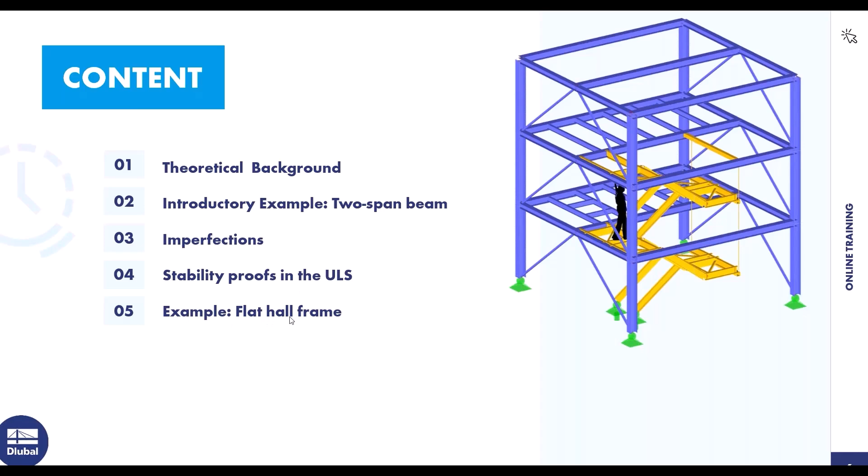That's the content today. At first, I say something about the theoretical background. Then we turn to an introductory example, a two-span beam. Then the next point is imperfections, then stability proofs in the ultimate limit state. And then we turn to a second example, a flat hall frame.

At first, I say something about the products for the design according to EC3. The most important add-on is the steel design add-on, and with that add-on you can design steel members according to international standards like Eurocode, AISC, and so on. We use or calculate or design according to Eurocode today.

Then there's the add-on torsional warping. With that add-on, you can consider the 7th degree of freedom and the torsional warping. Then steel joints: with that add-on, you can analyze steel joints based on the finite element method. Then there's the cross-section program, RSECTION.

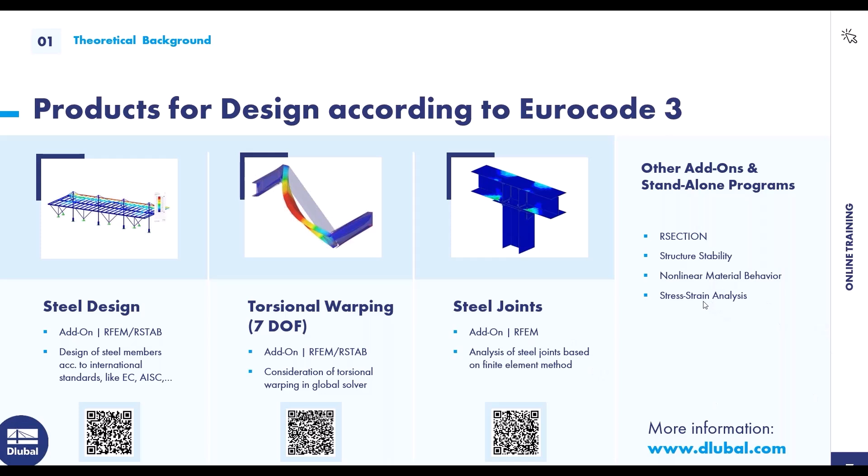Then the add-on structure stability. We use that add-on in the second example. Then there's the add-on nonlinear material behavior. You can, for example, consider a plastic design of steel plates and so on. And then there's the add-on stress strain analysis.

Okay, then a little insight into the whole safety concept in steel construction. The actions should always be smaller than the resistance. Those are the actions, this is the resistance. And in addition, we have certain coefficients that we have to take into account depending on what type of proof is used. You can see the different coefficients here, and those are the coefficients for the German national annex.

And you can see there is for the stability analysis another coefficient, the safety coefficient. But if you select the German national annex, for example, or another national annex, this coefficient is considered automatically by the program.

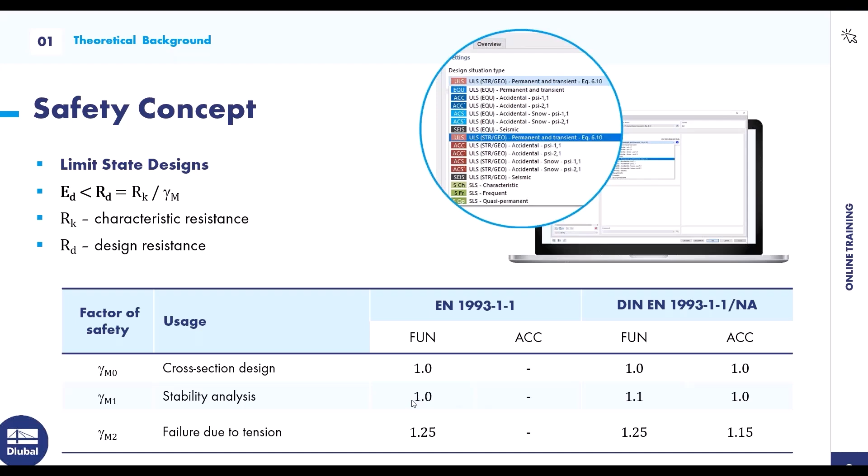So, okay, then the next slide: elastic or plastic global analysis. Whether an elastic or plastic calculation is possible always depends on the cross-section classes. There are 4 cross-section classes. For the first cross-section class, there's a high rotational capacity, and this allows a plastic structure calculation. Now, for example, you can consider plastic hinges, but it's not so often used in practice.

And the cross-section resistance can be applied plastically. Cross-section class 2, where there is a low rotation capacity, allows only an elastic structure calculation. And as with cross-section class 1, its cross-sectional resistance can also be applied plastically. So the first and second cross-section classes are where you can consider a plastic cross-section resistance.

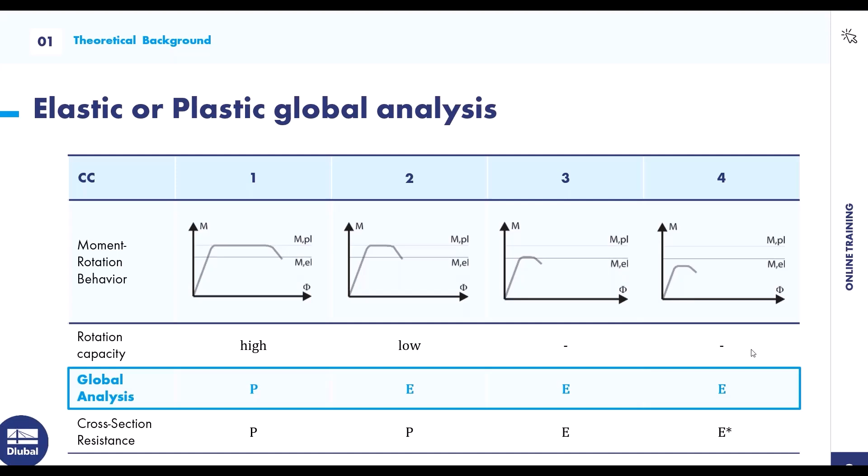That's the first example, the two-span beam, with a field length of 12 meters left and 12 meters right. A beam IPE 550, steel S235, a self-weight load case, and a load case with an imposed load. And we will calculate or do a cross-section classification, cross-section design checks, the difference between the elastic and plastic cross-section resistance. We take a look at the design checks: elastic, and elastic-plastic.

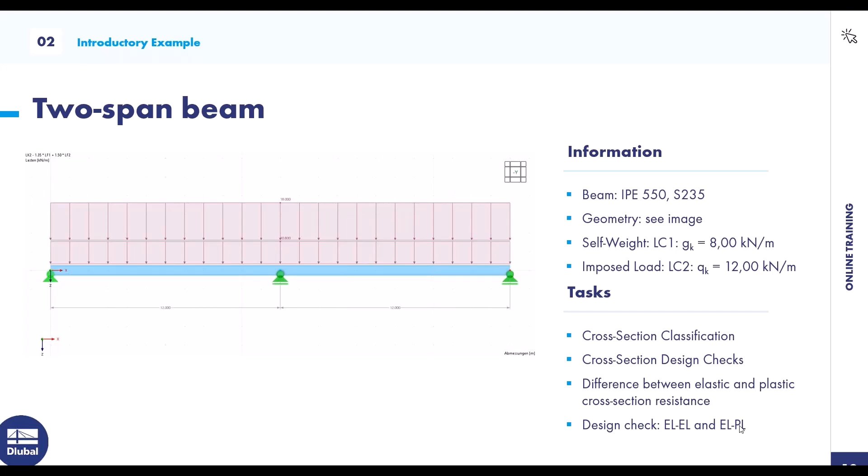Okay, I turn to RFEM. That's the second example; it's already prepared. But for the first example, I model the complete structure. File, new.

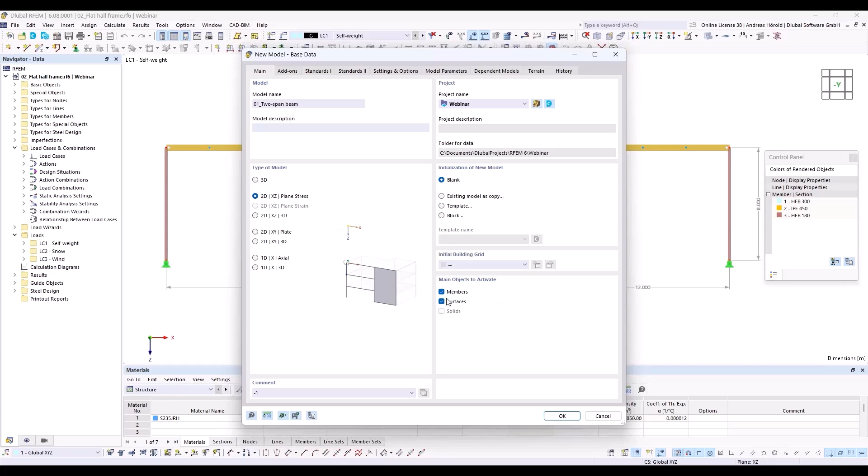So I enter 01_Two-span beam. Type of model 2D is sufficient. We consider only members, but you can also select surfaces. That doesn't matter. And we select the steel design add-on.

Then we need to select the standards. You can see there are, for the load case classification and the steel design, different international standards. We select the Eurocode, and for today we are in Germany here, we select the German National Annex.

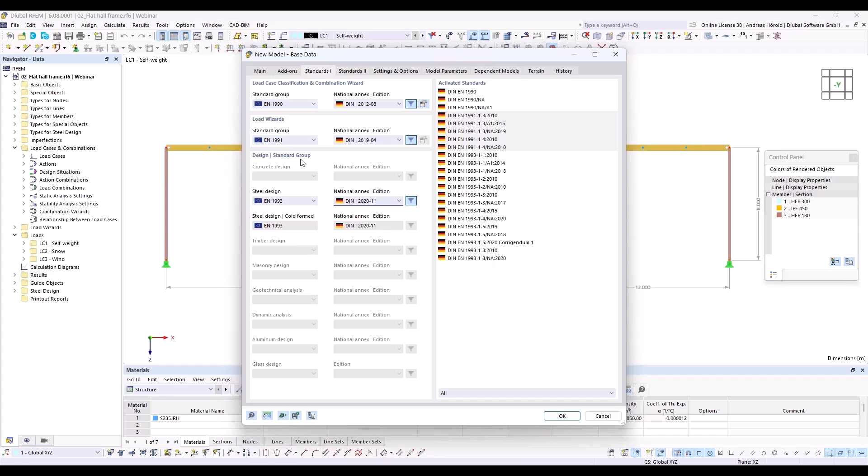We don't use the load wizards, but we use the load case classification and the steel design. We leave the dialog with OK.

So I turn to the view -y, move it a little bit. The grid is 1 meter. I leave that. If you want to change that, you can click on this here at the bottom, display grid, right click and then edit. And you can change the space for the grid points.

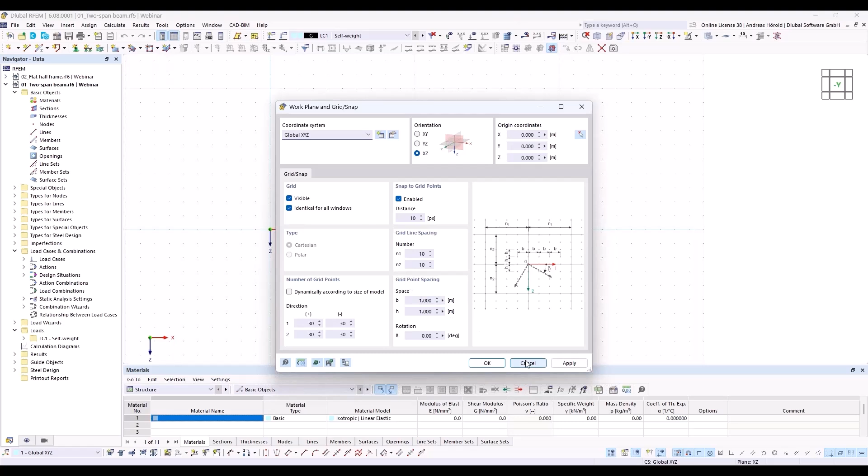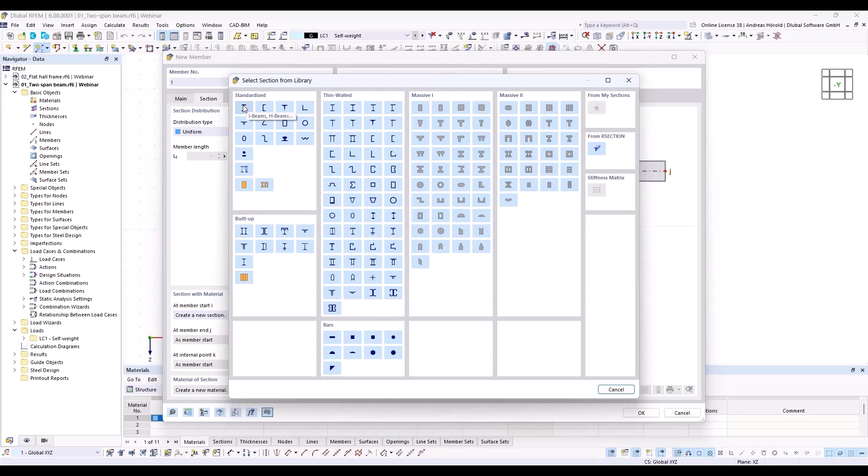So I start with the beam. Here, left above, new single member. I need to define a section. Create new section. I turn to the library. Left above, an I-beam. If I am too quick for you, that doesn't matter.

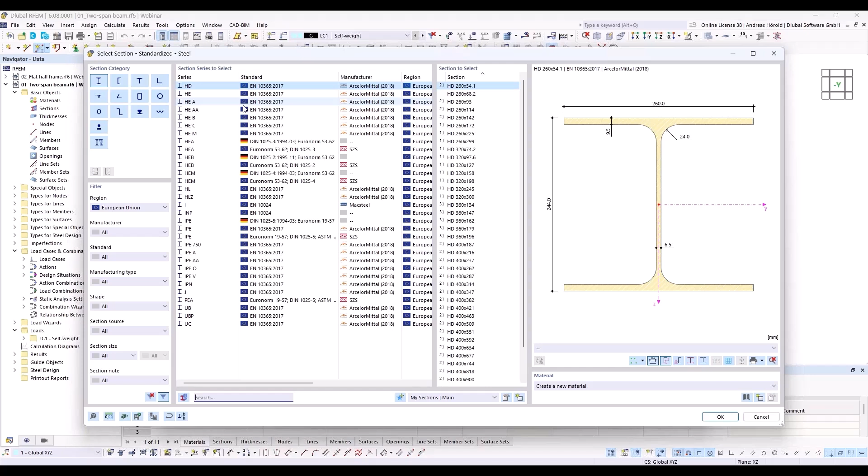That's sufficient. Okay, I select IPE 550, and right at the bottom I open the material library and I select European Union, steel, carbon steel.

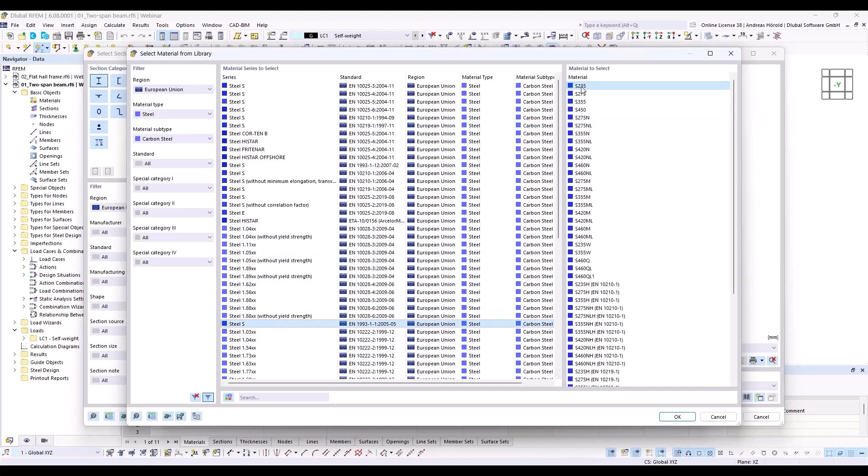There are a lot of steel materials. I use the steel material S235. Okay, you can see now the color is blue. That's okay.

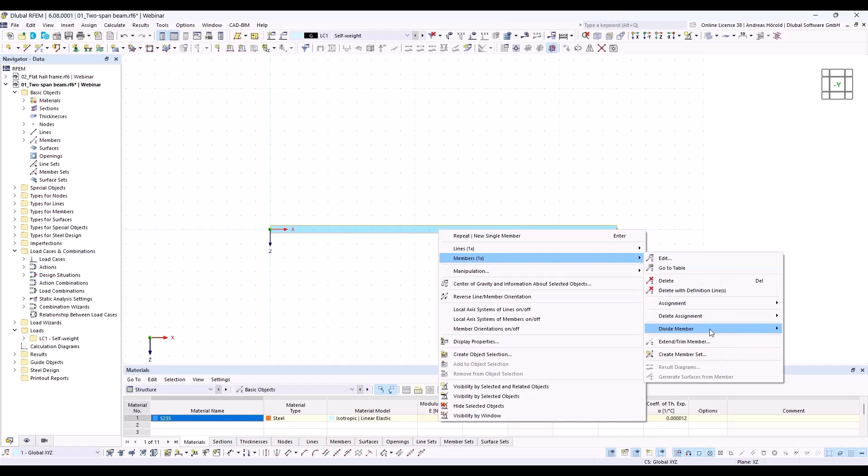So I create a member with a length of 24 meters and I divide the member in the middle with right click, members, and divide member and intermediate nodes. One intermediate node, and that I create the node without dividing the member. I select this option here, create on member nodes without dividing member. Okay, there's the node.

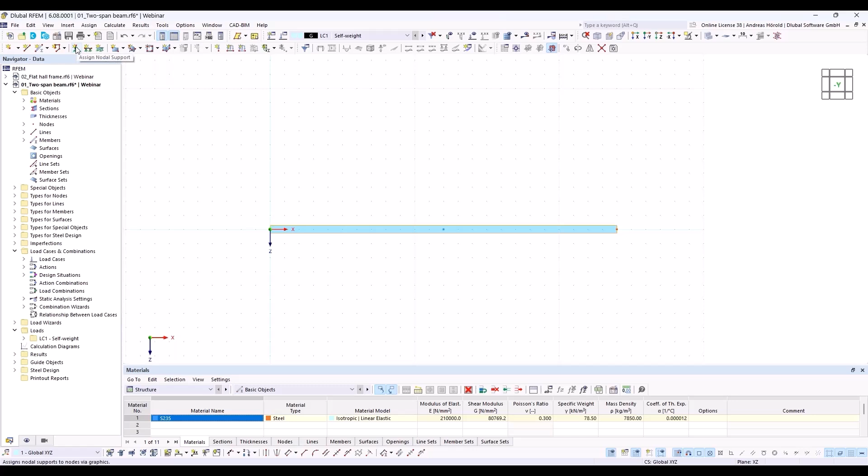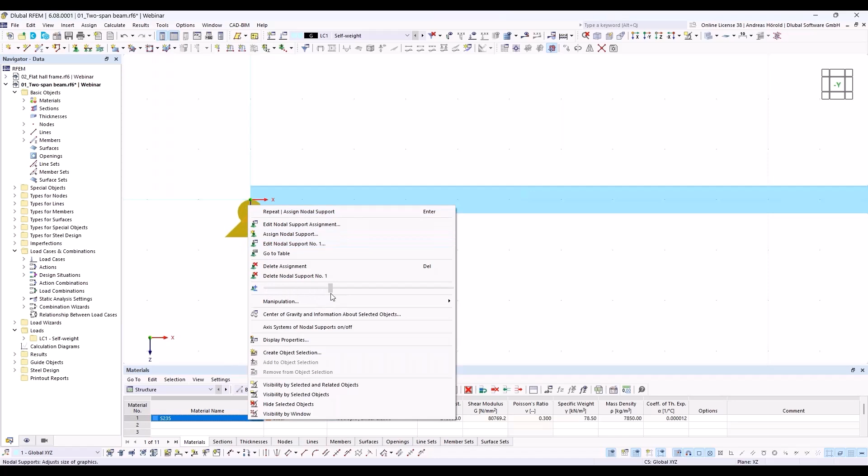So then I create the supports. Here left above, assign nodal support. So I press the edit button to take a look if all is okay. Yes, we support in an X direction and in Z direction. Okay, and this node is quite a little bit small. With a right click, I can increase the size of the support. Okay, that's enough.

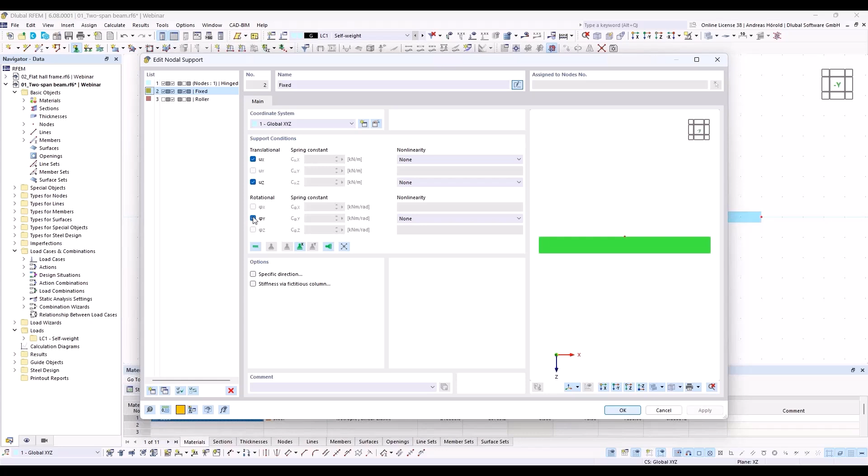So next support, I select the second support and press the edit button. We don't want to fix the rotation for the support, and we deselect the fixing in X direction. We only want to support the member in Z direction. Okay.

So that's all for the model. I create the loads. There's a self-weight load case. I select the edit active load case. The self-weight load case is automatically created for every model. So, and you can see also the self-weight of the structure is activated. That's correct in our case.

So, and above, this button, new member load. And our load should be a force, uniform. You can see there are different options. And the load direction should be in Z direction, in this direction. So and the load magnitude should be 8 kilonewton per meter.

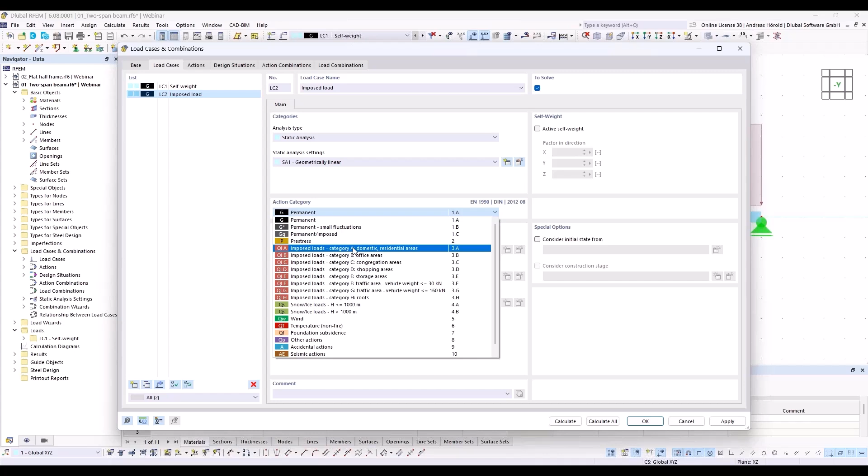Okay. So then I create a new load case with that button. I call it imposed load. And I select the action category, not permanent, but imposed loads. Okay.

Then I have to create the load for this load case, new member load, and this time 12 kilonewton per meter. Okay. That's all for the model and for the loads.

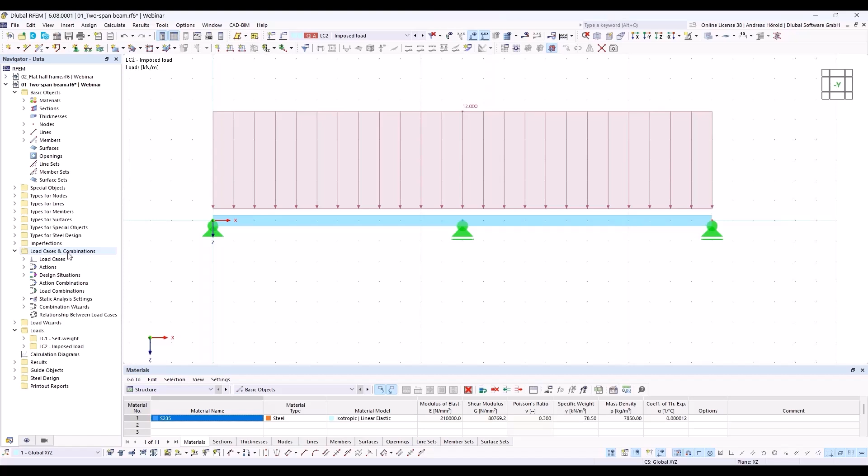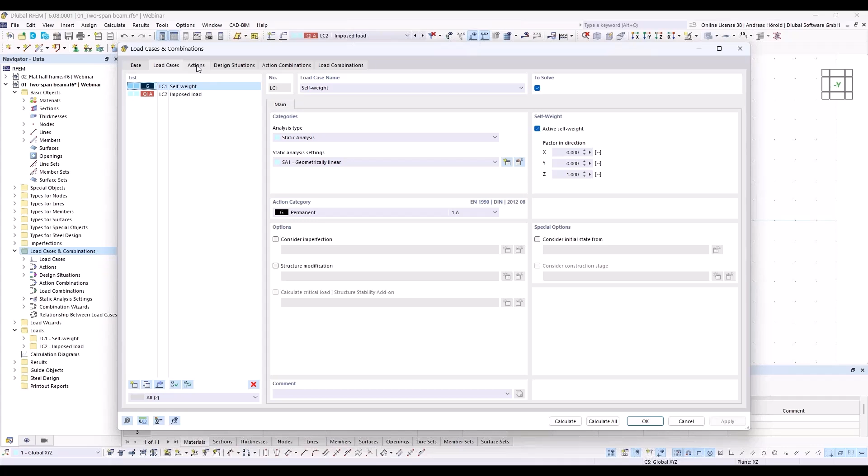I open the load cases and combinations dialog again, this time over the navigator data with a right click. Load cases and combinations. Where are the base data? Now, at the beginning, we selected the standard group Eurocode and the German national annex, and we activated the combination wizard. Those are my two load cases. We've got only two actions.

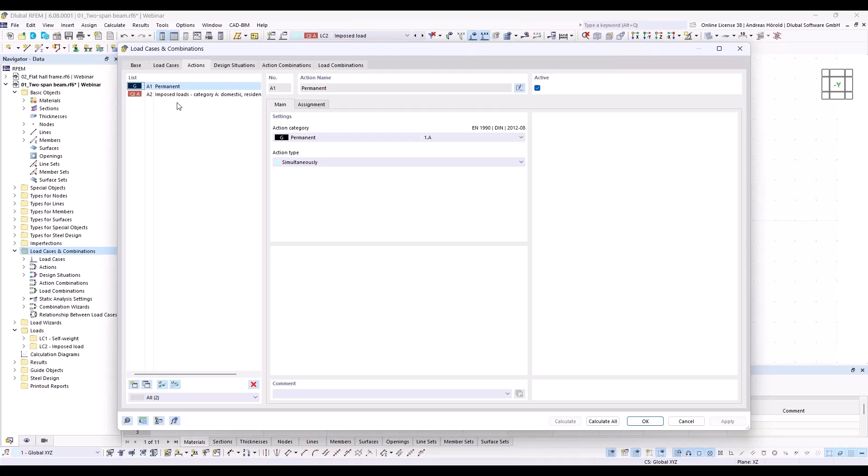Now, that's quite important when you have, for example, 4 wind load cases. Then there's only one action for the wind load cases. And yeah, you can combine in the load combinations either wind in -x or wind in +x and so on. Okay.

So then there are the design situations. We would like to design only according to ultimate limit state. That's why I delete the design situations for the serviceability limit state. And what's important, we need to activate the steel design.

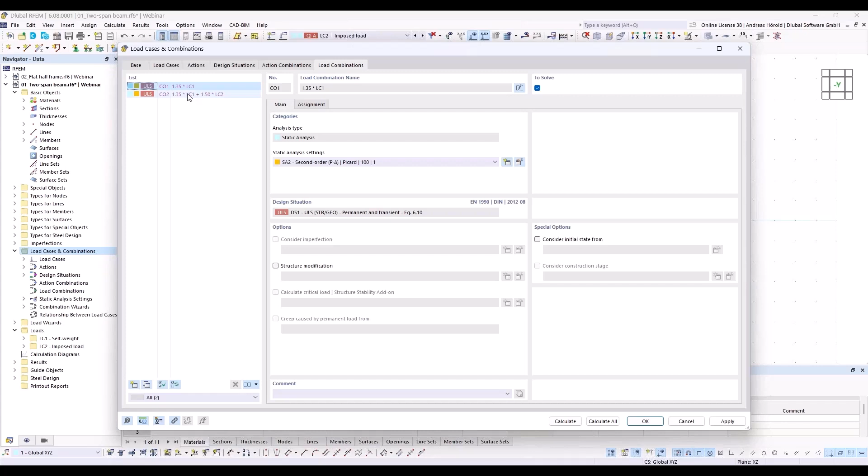So, and there are only 2 load combinations. And if I turn back to the design situations and to the overview, where are assigned these 2 load combinations for the design situation, ultimate limit state design. So then we can calculate also the steel design.

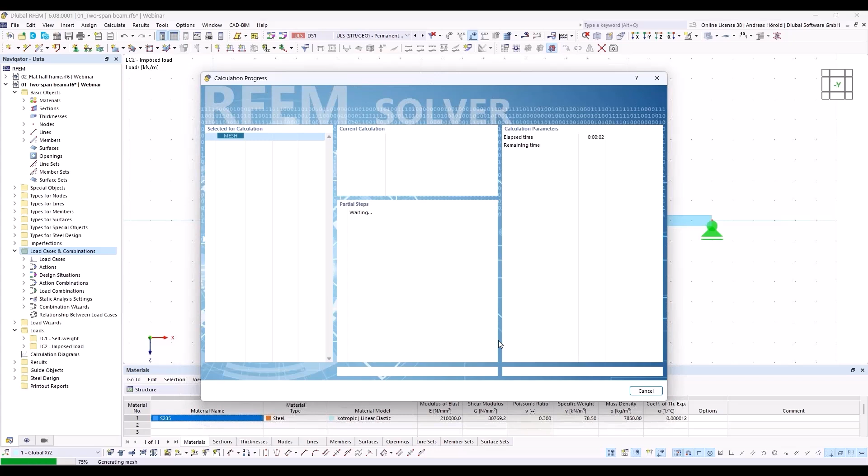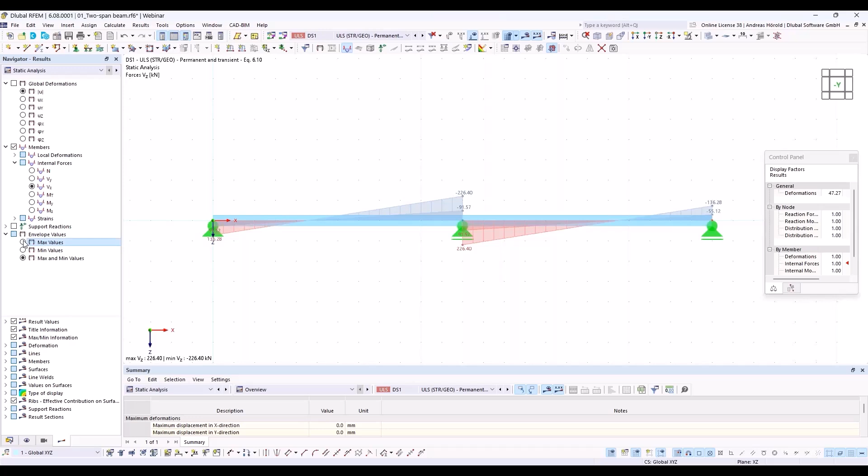At first, we take a look at the internal forces and the navigator results on the left side. The VZ, for example, I can also select only the maximum values, not minimum and maximum. So, VZ and MY.

So then we can go to the table at the bottom and to the steel design. An error is displayed after the calculation. This is because we haven't made any steel design settings yet. We are only interested in the cross-section verification here.

Therefore, we change to the table design ratios and members. So there's the section proof for shear and for bending, and you can see a plastic design was done for the program. So if I select the line and press this button, design check details, this dialog is opened.

A detailed presentation of the proofs is now possible. You can see the equations and where you can find them in the standard. Then cross-section classification: you can see where the cross-section is classified, in class 1. That's why a plastic design is possible.

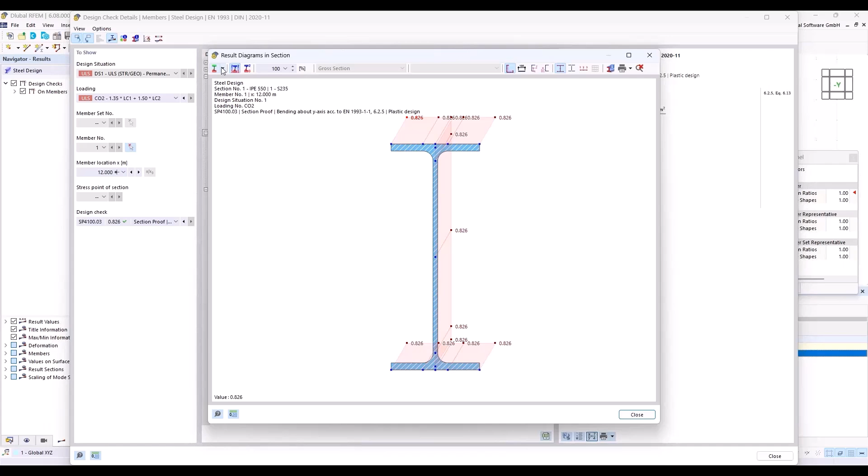So we can also take a look at the result diagram, the design ratio, the stresses. That's the stress in the middle, or over the middle support, and there's tension at the top and compression at the bottom of the cross section. So yeah, okay, that's all.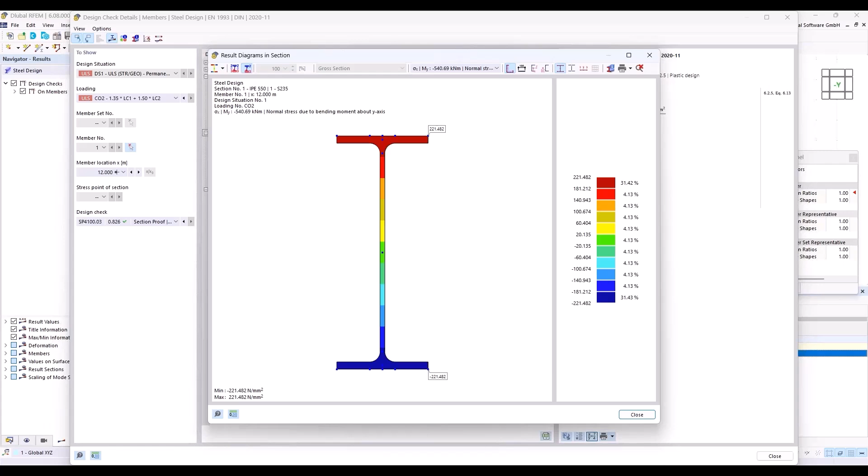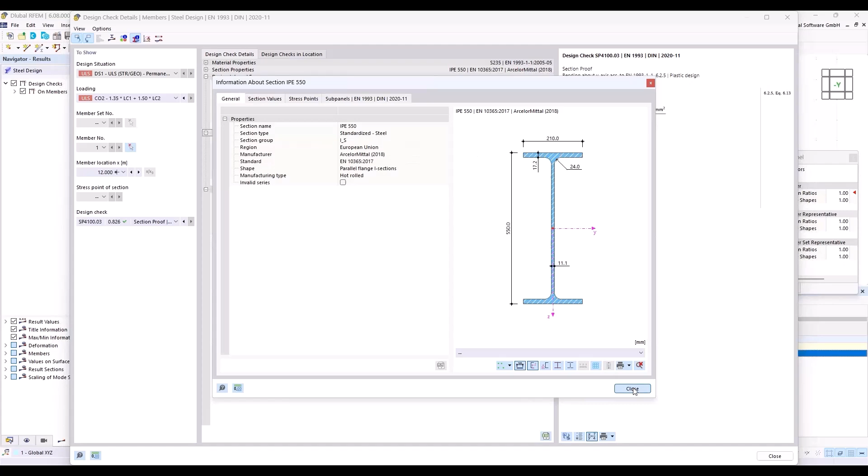Can I also show the cross section information, the stress points, the different sub panels for the cross section classification, the C to T parts. Okay, that's all. Yeah, and the same, if you want to check the proof for the shear, you can either press that button or double click on the line, and you can see the equations from the standard.

Okay, now we don't want to do a plastic, but an elastic design. How to do that? I turn left at the bottom to the navigator data. Then I open the steel design folder and the ultimate configurations, and I double click on it.

Then I can, for example, uncheck the stability design. Then this error message doesn't appear, but it doesn't matter. I select that button here: elastic design also for class 1 and class 2 sections. It's allowed to do a plastic design for class 1 and 2, but in this case, we would like to do an elastic design also for the cross-section class 1. In our case, the cross-section is cross-section class 1.

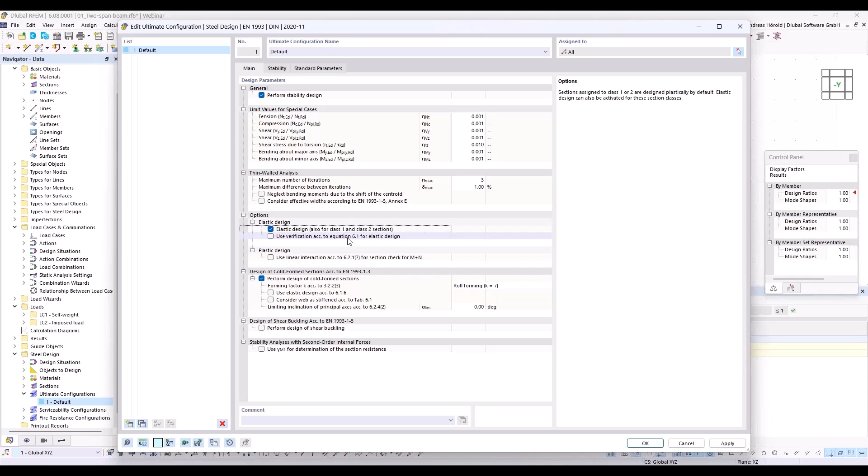Okay, we calculate or rerun the steel design again, and I select design ratios and members. I remember we had a design ratio for the plastic design of 63%, and now we have got 94%, because we do an elastic design. And if I double click on it, I can see the equation.

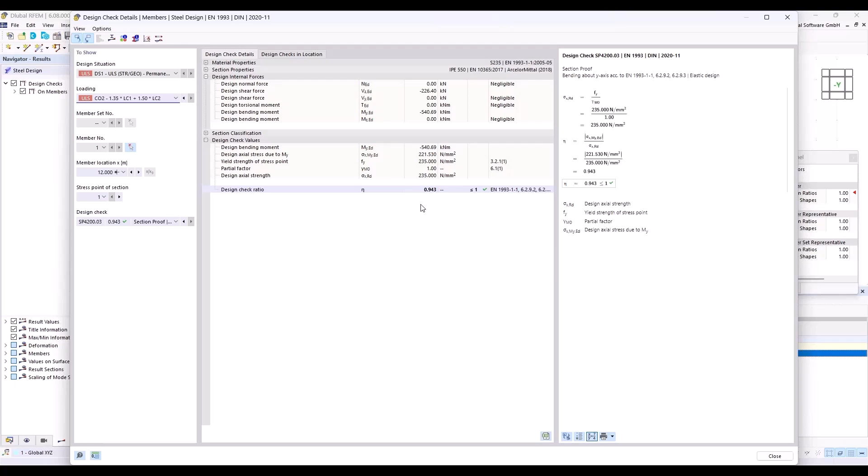Okay, what you can hold in your mind is that we can every time do an elastic design. We can consider the elastic cross-section resistance. That's what we did in the second step, in that step here. So we have now learned how to carry out a cross-section check and how to take the elastic and plastic design into account. At first the plastic design, in the second step the elastic design, because elastic design is allowed for all cross sections. And in addition, we now know how to display the design formulas and compare them with our own manual calculation.

Then we turn to the next topic for today: effects of deformed geometry of the structure. In the first training course, Introduction to Member Design, it was learned how the results can differ between the calculation according to the first order theory, the geometrical linear analysis, and the second order theory. The geometrical linear analysis is an equilibrium formation on the undeformed system, and the second order analysis is an equilibrium formation on the deformed system.

In this example of the cantilever column, this effect can be seen very well on the basis of a slender and a compact cross-section. In the case of the slender column, the increase in the bending moment at the foot point is much larger than in the case of the compact column, if one calculates according to the second order theory. And there's no difference when you apply the geometrical linear analysis.

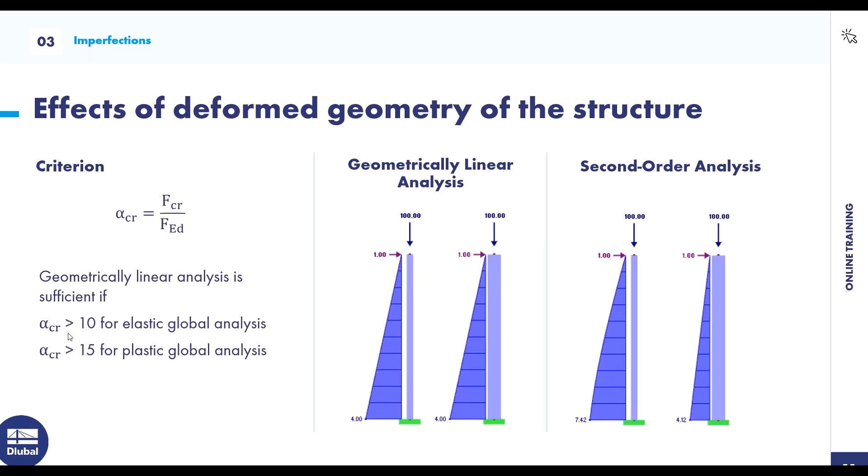So the next point is the equivalent geometric imperfections. Imperfections are closely related to this topic. In Eurocode 3, these are generally grouped together as equivalent geometric imperfections. Imperfections are production-related deviations in the model geometry and/or in the material properties. There can be real misalignments in classic hall constructions or tolerances in production, especially when rolled sections are used, and these imperfections can be summarized as equivalent geometric imperfections.

On the left side of the graphic, you can see the initial sway, the global imperfection that can be applied to the structure. And if individual components are to be examined more closely, there is the local equivalent imperfection, for example the initial bow imperfection. This depends on the selected profile, the yield point, the buckling curves, and the proof method. These are the two variants of the equivalent geometric imperfections.

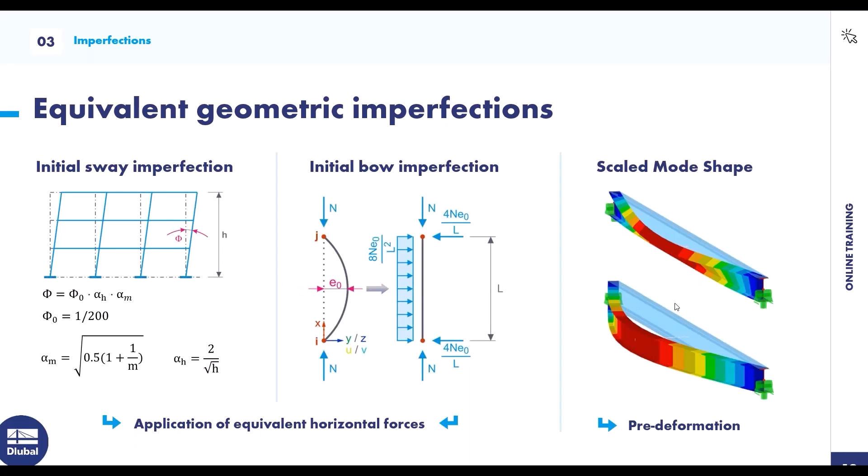You can see that in a later slide.

When designing steel in RFEM, 3 different stability analyses are carried out. On the left side, there's the classic flexural buckling as a lateral deflection. Then in the middle, you can see the torsional buckling in pure torsion. And on the right side, the lateral torsional buckling as a combination of the two previous proofs.

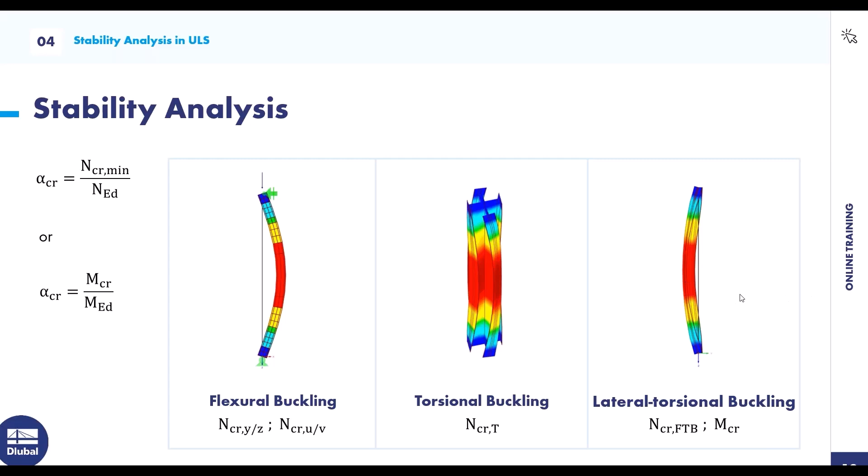Okay, methods for stability analysis. There are 3 methods. Method A: you have to apply a global and local imperfection, and the structure analysis should be done with the second order analysis. Then you can do the cross-section design checks with the internal forces.

Method B: global imperfection means only this initial sway imperfection, and then the structure analysis according to second order analysis. What's quite important, you have to consider the buckling length by the member length, not with a factor. So SK is equal to the length.

Okay, then method C: structure analysis according to geometrical linear analysis on the ideal structure, but in that case with the real buckling length.

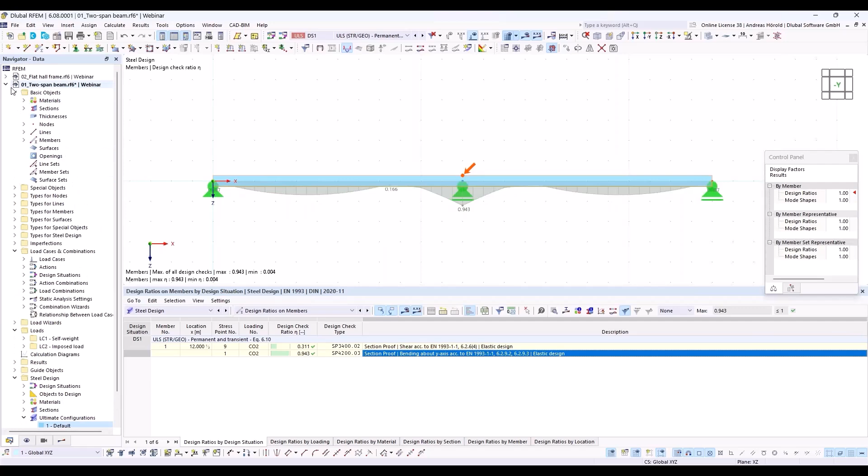Okay, so then I turn to the program, to the predefined example. So that's the construction self-weight load case, then a snow load case with loads, for example, from purlins, and a wind load case, wind in X direction with wind pressure and wind suction.

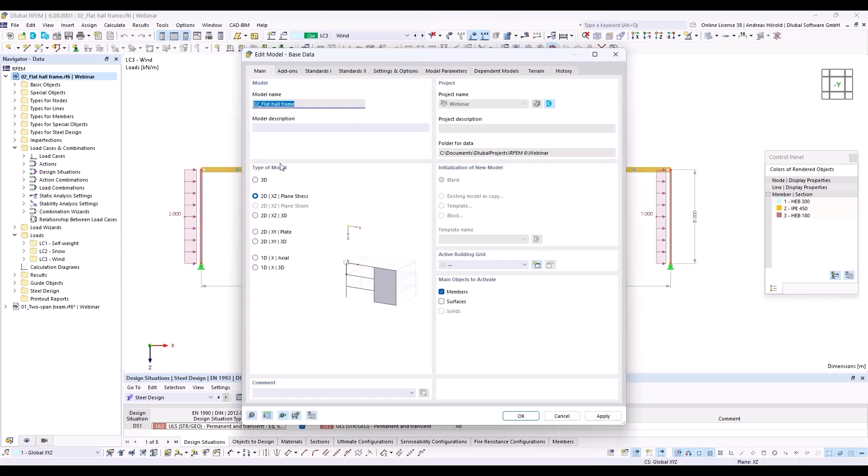Left above, I turn to the base data, a 2D model, and we use the add-ons structure stability and the steel design add-on. We select the standards Eurocode and the German National Annex. We use the add-on structure stability to check whether we are allowed to determine the internal forces according to the geometrical linear or second order analysis.

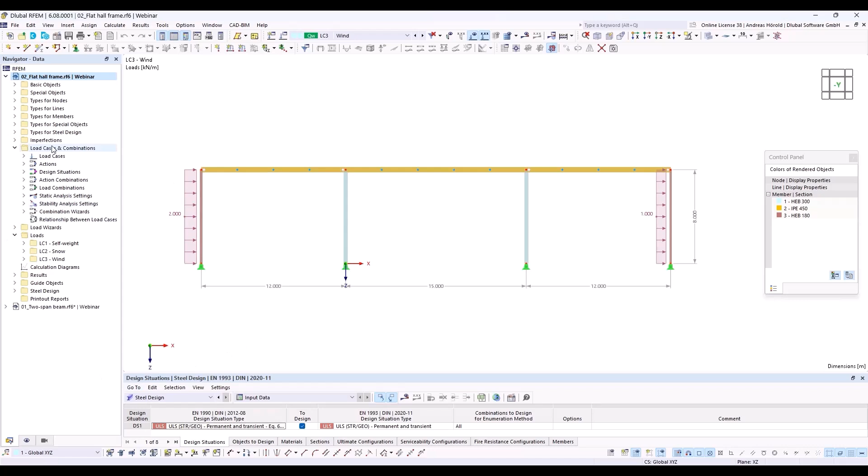That's why we turn to the load cases and combinations, and I go directly to the design situations. I select the geometrical linear analysis, and I edit that, and I activate the stability analysis. Okay, and I run the calculation.

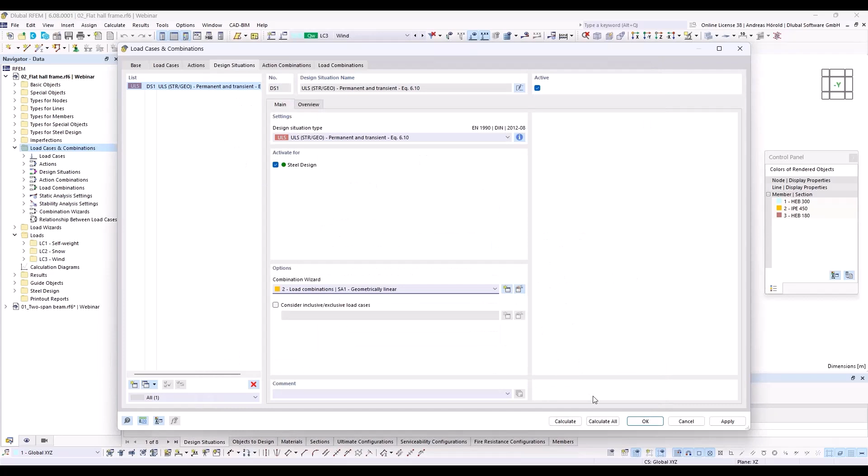So, and after the calculation, we see the minimum critical load factor, 6.05 for the design situation, and 6 is smaller than 10. Yeah, we need to do a stability design by using the second order analysis.

But what I already mentioned, for the stability design using the classic equivalent bar method, meaning method C, the internal forces can be calculated according to geometrical linear analysis, and buckling lengths must be assigned to the columns. But for the design of the lateral torsional buckling, the application of the second order analysis is also required with this method. That's why I switched to the second order analysis.

For the columns, we consider the effect twice: one time with the second order analysis, and with the real buckling length. But we need to apply the second order analysis because of the horizontal beam and the lateral torsional buckling.

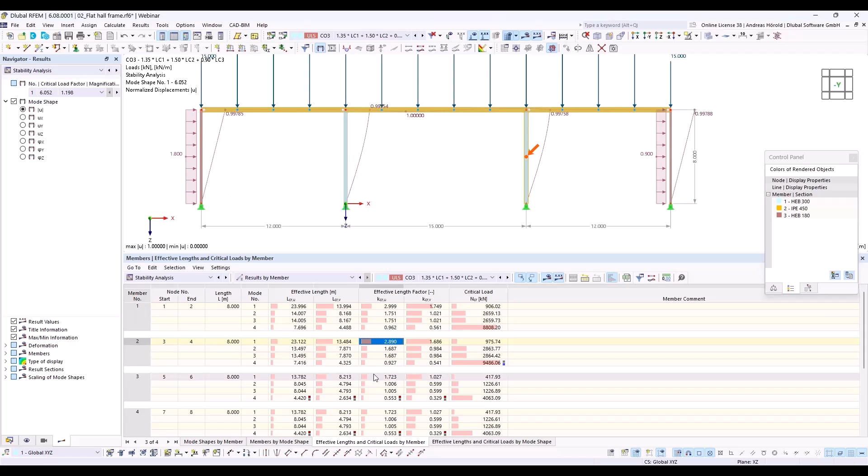So this column has an effective length factor of 3. This column, we apply also 3 for this column. And for the left and the right column, 1.72.

So I turn back to the design situation and we run, or we use the second order analysis. Okay, that's okay.

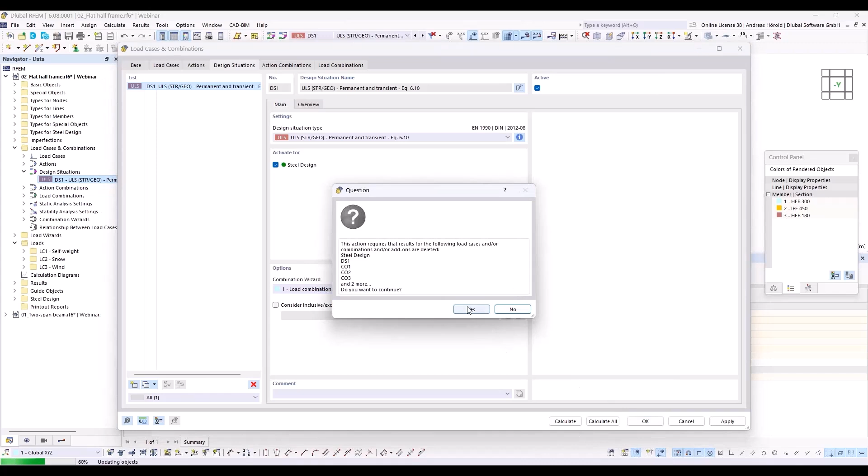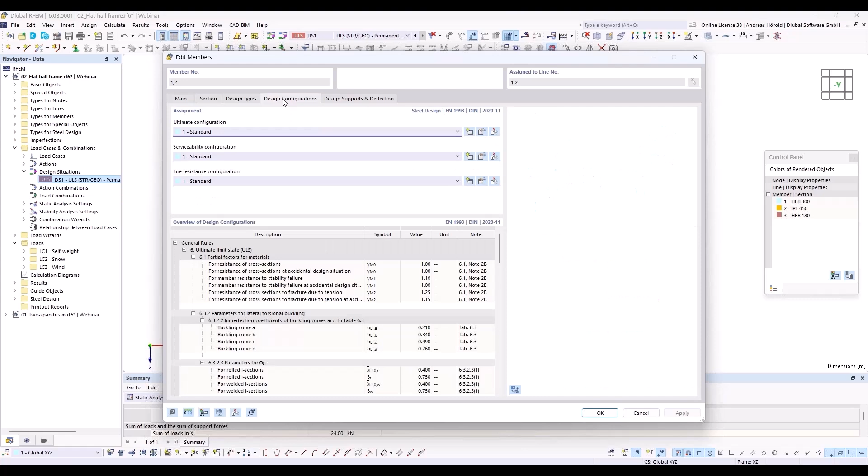So, and now we define the effective lengths, or we assign them to the columns. I select the inner columns, then I do a right click, members, edit, and I turn to the design configurations and design types, and I define effective lengths.

Okay, then I select the left and the right column. I press the control key, you can see the plus sign. I would like to select both columns. Then right click, members, edit. The same procedure: design types, effective lengths, and 1.72. Okay.

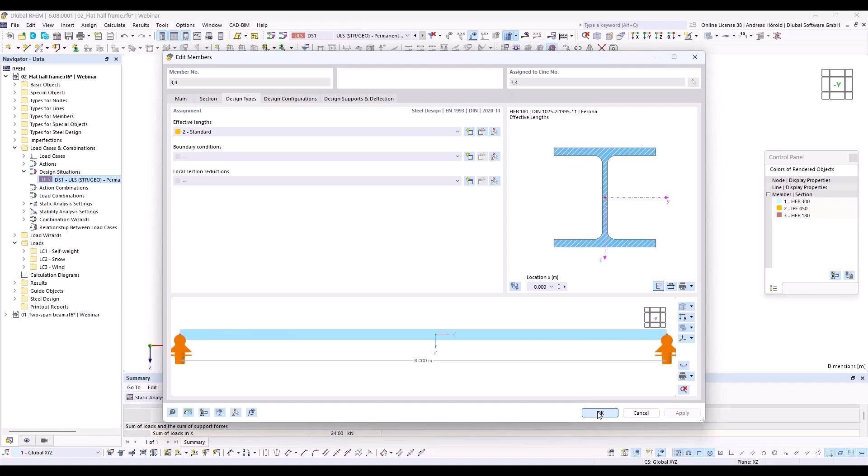And you can display the effective lengths. Then we go to navigate, display, then types for steel design, and I select member effective lengths. And you can see the factor 1 and 1.72.

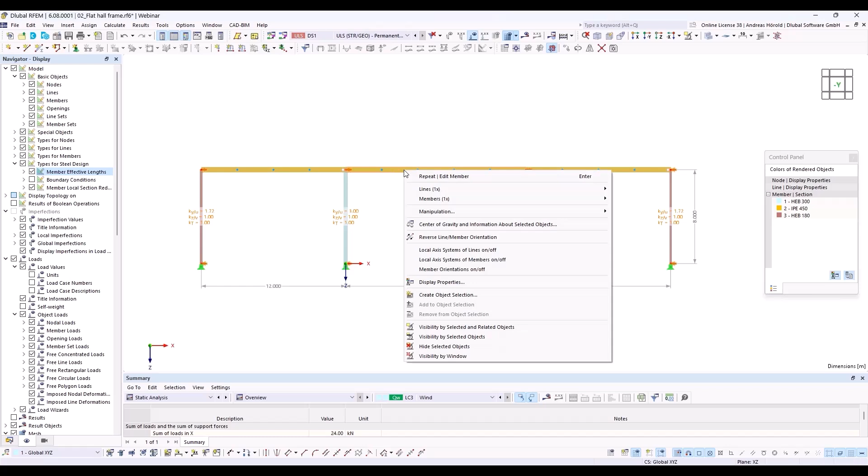So then I select the inner horizontal beam by right click, members, edit, then design types, effective lengths. I create a new effective length.

So this time we would like to consider the horizontal supports, for example by purlins. I press this button here, select member or member set. I select this member, and the program will detect all these nodes here. You can see that here. And we would like to fix it in horizontal direction.

I would like to consider that the upper flange is supported, since the purlins lay over the horizontal beam. That's why I select all these lines here, and I define eccentricity type at upper flange.

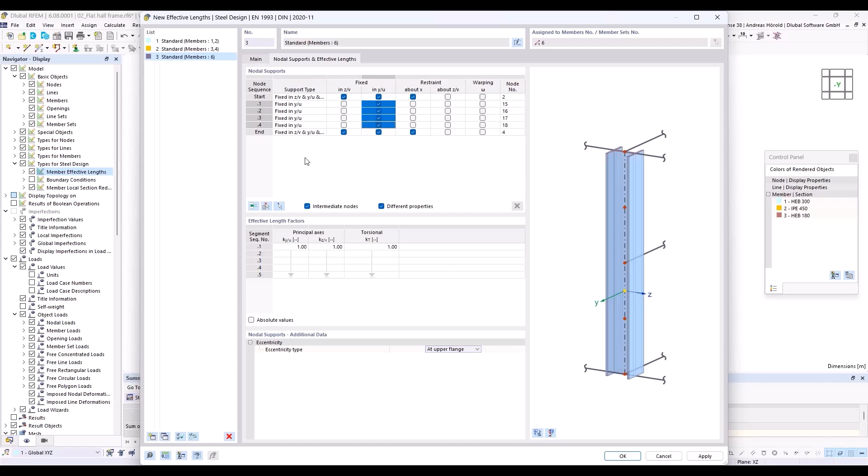Okay, I can leave the dialog and you can see the supports. Fork support at the beginning and at the end. And for the inner nodes, there is only a horizontal support at the upper flange by the purlins. So, okay.

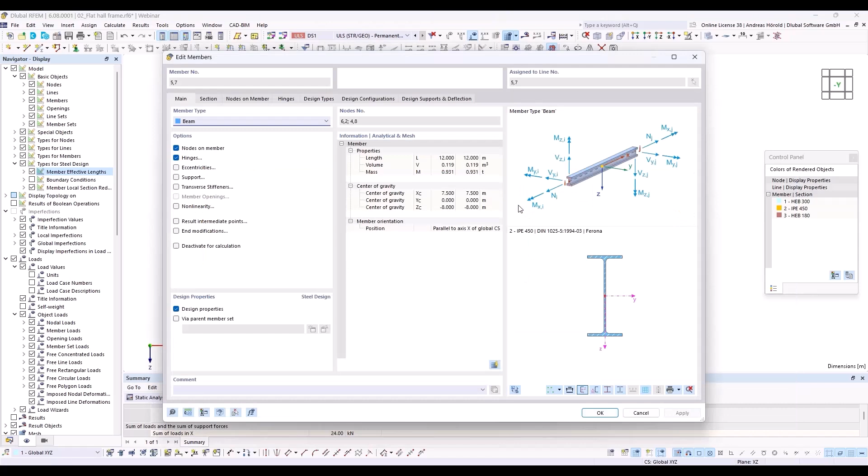We need to do the same for the left horizontal beam and the right one. I select both with the Control key, then Members, Edit. I select the same effective length as for the middle horizontal beam, and you can see the program detects automatically that there are only 3 nodes supported and 4 nodes.

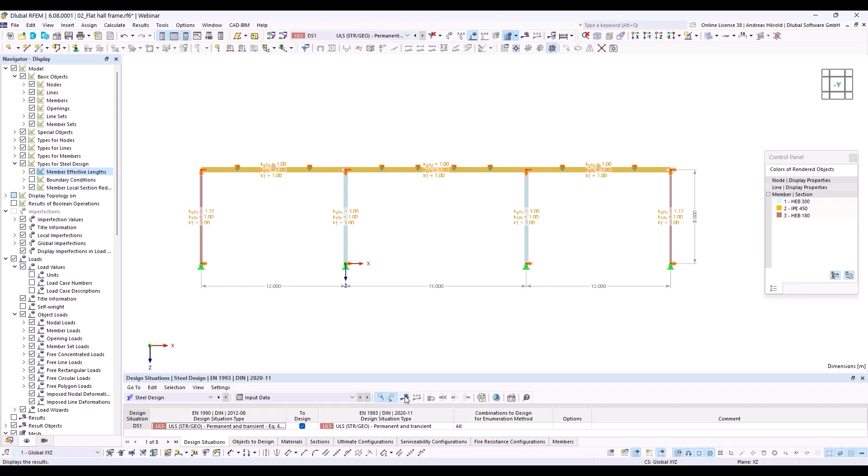Okay, then we can run the calculation. I turn to Steel Design and press this button, Show Results, and the calculation starts. So the calculation is done. We have a maximum design ratio of 84%, stability, bending, and buckling about principal axis.

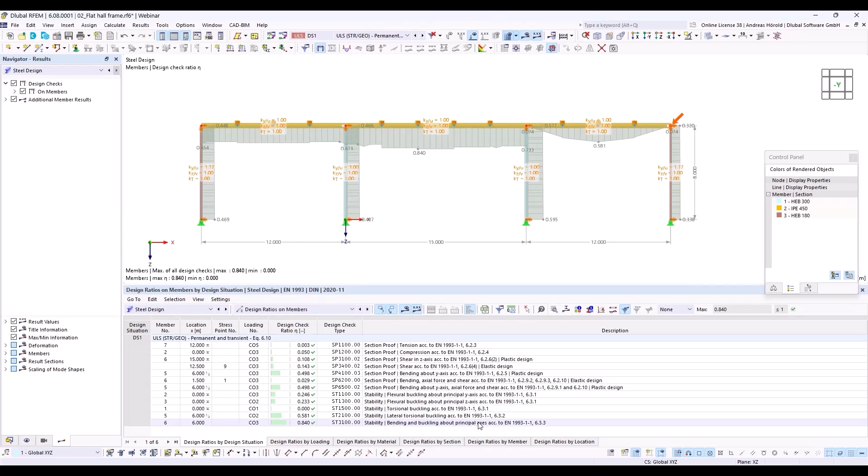So I can double click on it and you can see the design checks, the equations, and where you can find it in the standard. Okay, this was the classic structural component design, method C, without imperfections but with effective member lengths.

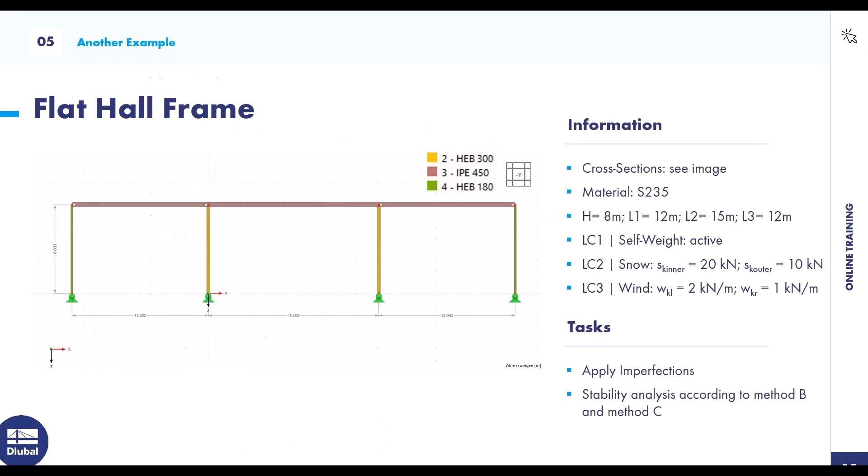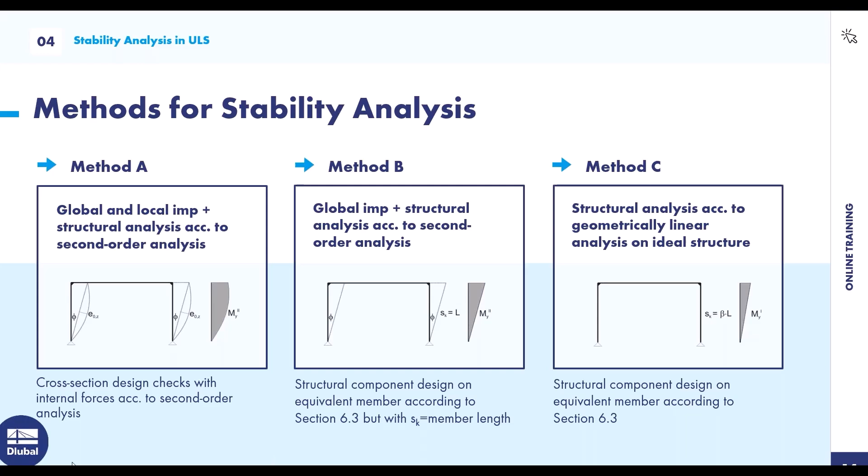Now we want to examine the model using the approach of global imperfections and the structural component design method B. I turn back to the PowerPoint. We did method C, with the effective member lengths and without imperfections. Now we define imperfections, and I delete the effective member lengths for the columns. We say, or we consider SK equal member length. Okay, I turn back to the program.

Left at the bottom, I go to the navigator data, then types for the steel design, effective length. Let me save that state, save as, without imperfections. Okay, I overwrite it.

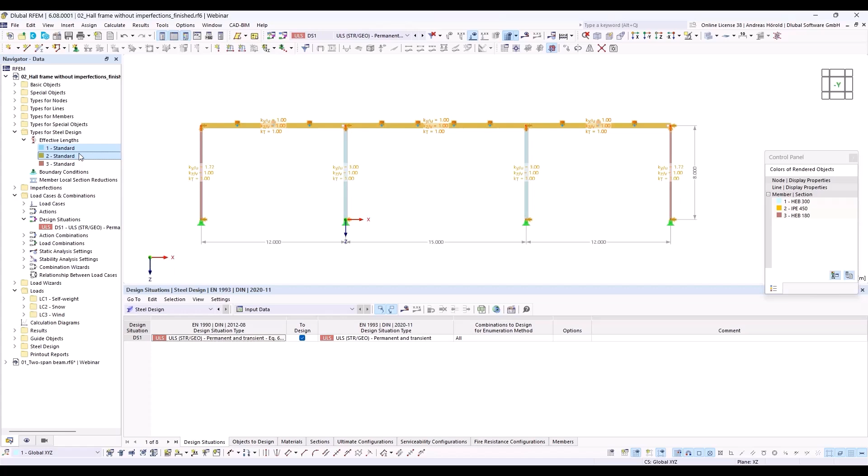And now I delete the effective member lengths, or the buckling lengths, for the columns. Delete. Okay.

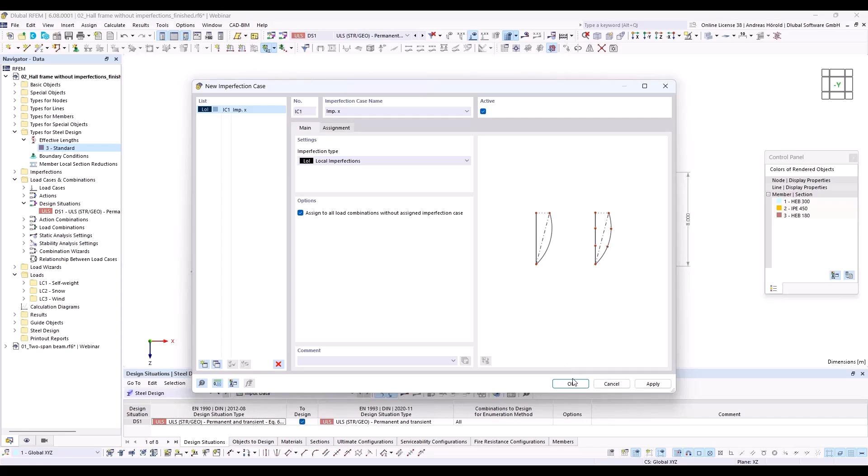And in the second step, I need to define imperfections. So above here, that button, new member imperfection. I have to create an imperfection case in the first step, imp x. We have got imperfections and imperfection cases—you can consider more imperfections in one case. That's why we have imperfection cases and imperfections. That's the case, okay? And now we create the imperfection for that imperfection case.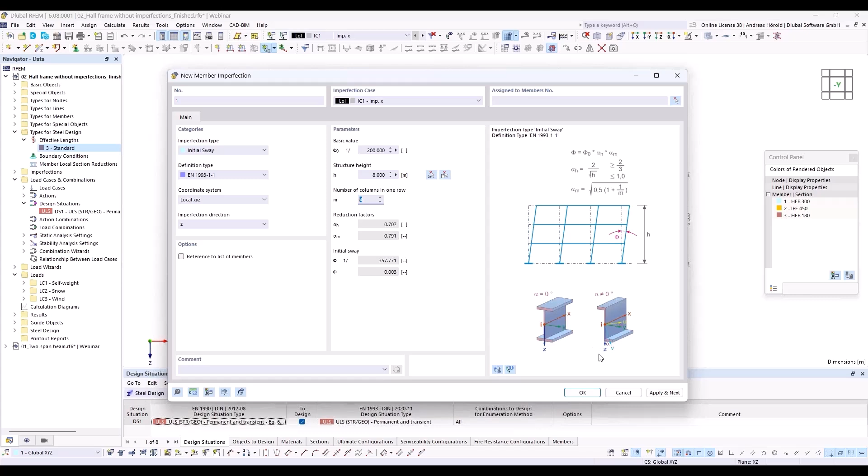We define an initial sway, define type as Eurocode 3. The imperfection direction is Z, in the strong axis. Then the basic value is 200. I can measure the structure height, 8 meters. Number of columns in one row, those are 4. And the reduction factors are calculated automatically. Okay, and I need to assign it to all 4 columns.

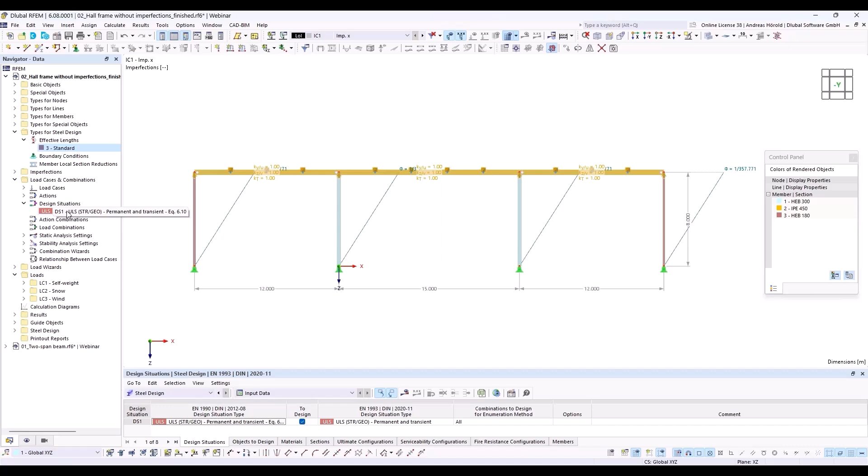And to display it, I have to press this button above, Show Imperfections. So, and now we can run the calculation. Or before I do that, I take a look at the design situation, second order analysis, and it must be checked that the program considers the imperfection cases. Okay, now we can calculate all.

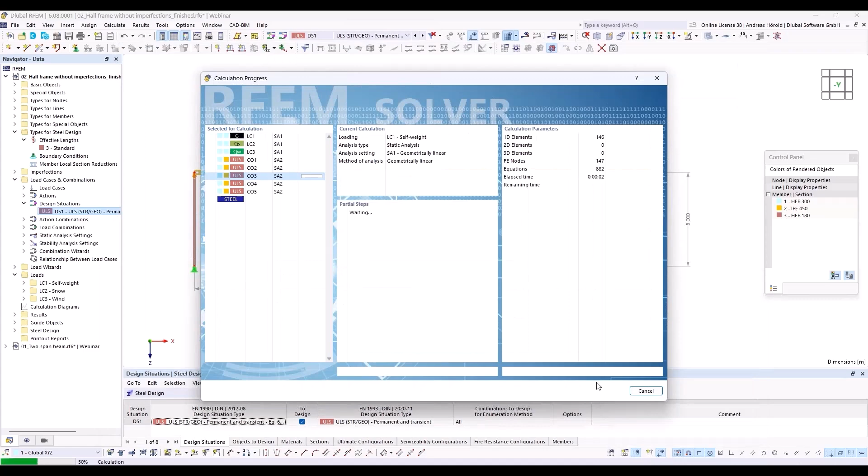So we go directly to the steel design, design ratios on members. Yeah, and you can see the design ratios. With method C, we had a design ratio of 84%. Now we've got 86%. That's quite similar for different methods.

Okay, yeah, that should be all for today. You learned in the second example how you can apply method C in the first step, and then with imperfections with method B in the second step.